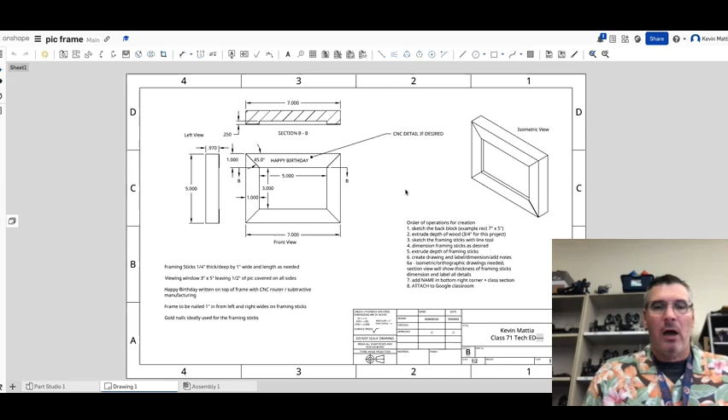All right, everyone, we're going to go ahead and make a picture frame today. We're going to make the picture frame on Onshape. It's going to look a lot cleaner than using a piece of paper and a pencil. And we're going to add some notes on this as well. The order of operations that we're going to follow is listed right here, and that'll all be available for you as well with this video.

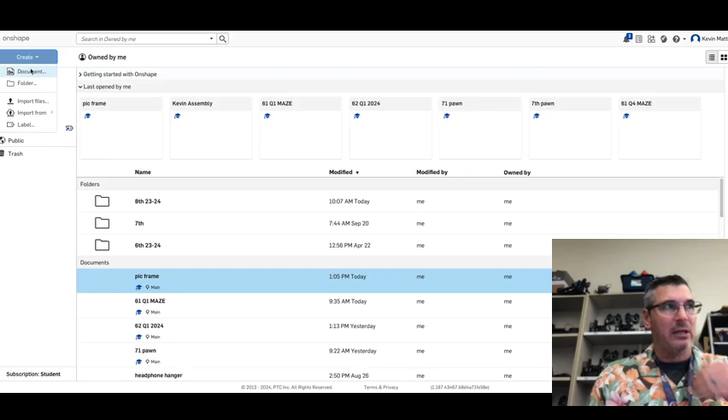So here we go. I'm going to start off at onshape.com. I'm going to go ahead and create a new document. And it's a picture frame, so I'm going to say Mattia pic frame. So you're going to put your first name. Don't put Mattia. You put your first name.

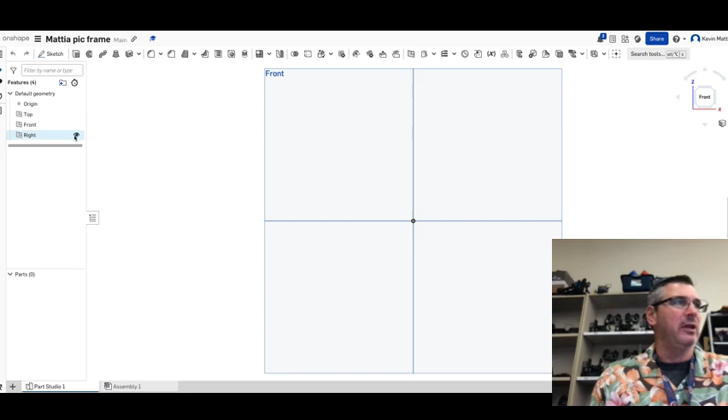So as always, I like to go to the front plane in the upper right-hand corner, and that'll square it up. And I like to hide these lines just so they don't get caught up in the way of us drawing. So you go to the eyeball next to top, right, and origin. And now we have the front plane ready to go. We're going to go ahead and draw. So the first thing we're going to do is make a sketch. My sketch plane is this front plane.

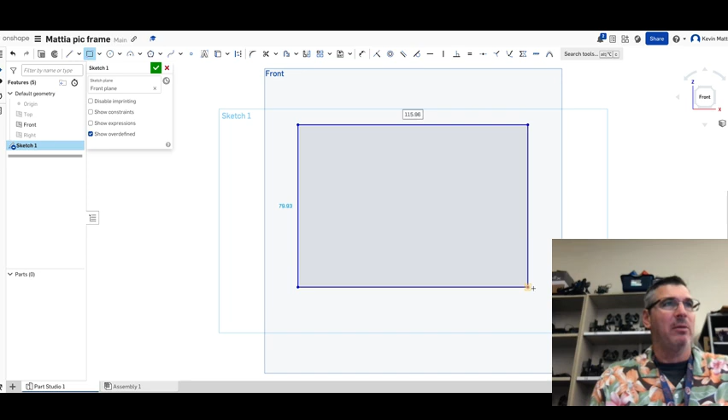Grab my rectangle tool. We're making the back block. The first thing we'll do when we create this out of wood is create the back block. Now I see that I'm in millimeters right now, so I'm going to go up to where it says Onshape, and there's 3 lines there, and I can change workspace units to make this inches instead of millimeters. So please change that to inches. I'll open up Sketch 1 again, and we're going to go to my dimension tool.

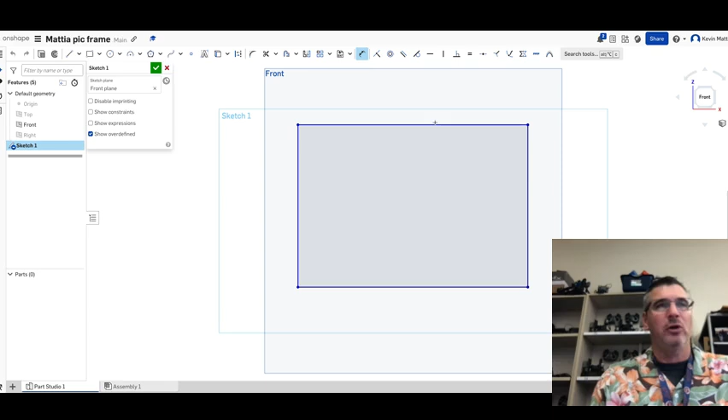Now, what size are you going to make this? I'm going to keep this as a straightforward picture frame, but you guys can do whatever you want. What size will it be? It's kind of up to you. I'm going to make it 7 by 5. So 7, enter that dimension, and then 1 click, 5, enter, and then I have a picture frame at 7 inches by 5 inches.

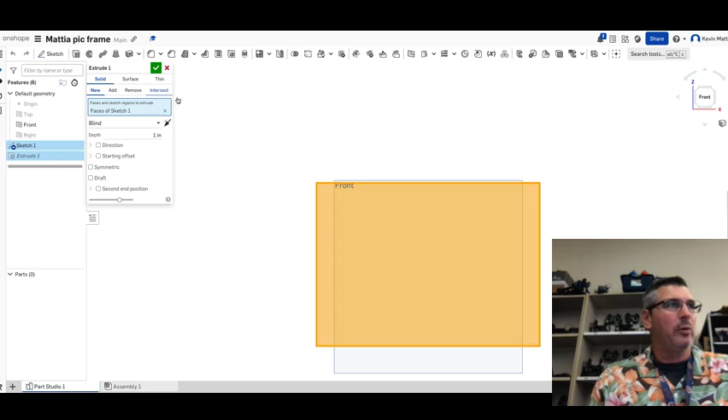Now I need to add my depth, and just knowing the wood, it's about 3/4 of an inch deep. So I'm going to extrude, and make a new one because there's not one here currently. 0.75 inches is my 3/4 of an inch depth. All right, there's my picture frame back block. So we'll make that out of wood first. We have this back block, and then we've got to put those framing sticks on, where we're going to work on cutting 45-degree miters and hammer and nail those on.

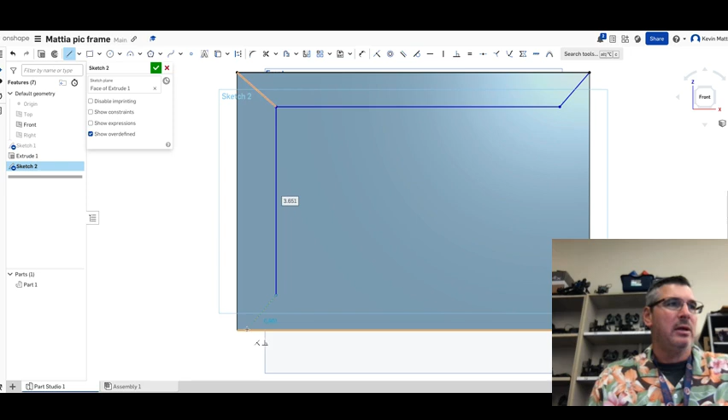So let's go ahead and add our framing sticks now. I make a sketch. My sketch plane is this surface here. I'm going to grab my line tool, start off in the corner, and drag that out, boom. Then I'm going to come across, boom, and then across here. And then I'll go all the way back across there. Good. And then I'll do that again, this one from this point down here. And you know how it is. We draw first, then after we draw, we can dimension. There we go. And I'll come across here to there. And that looks pretty good.

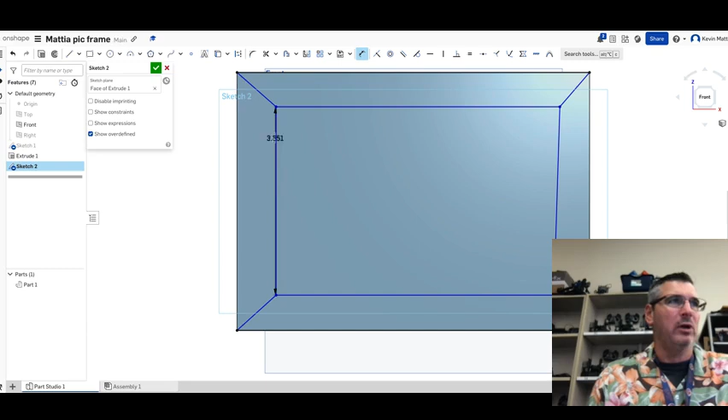Now we go to dimension. So I'll dimension, 1 click here to 1 click here. Now this is 7 by 5, and my picture is a 4 by 6. That's what I'm planning on. So the picture is 6 inches long, and this is already 7 inches long. If I make this piece here 1 inch, 1 inch plus 1 inch is 2, and 7 minus 2 is 5. So the picture is 6 inches long and 5 inches is my viewing space. That would work out. So I'm going to make this framing stick 1 inch. You have to consider what size it will be.

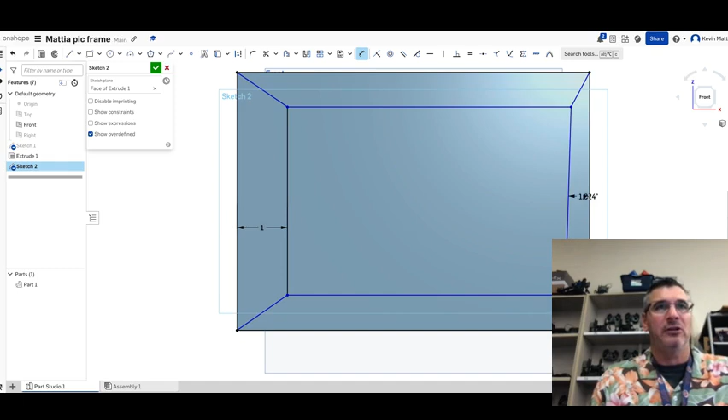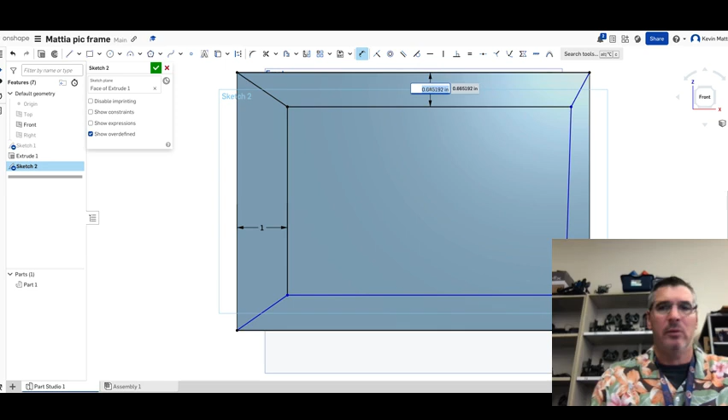Now this is angled here, so it's going to give me a degree. I'm going to make it 0. Whoops, I'm going to undo that. Let me undo this one here. Undo. Try that again. Dimension 1 to here. Yeah, we're going to go 1 inch. And we'll do this one, the other one there last. 1 inch. Okay, and then we've got to finish this one off.

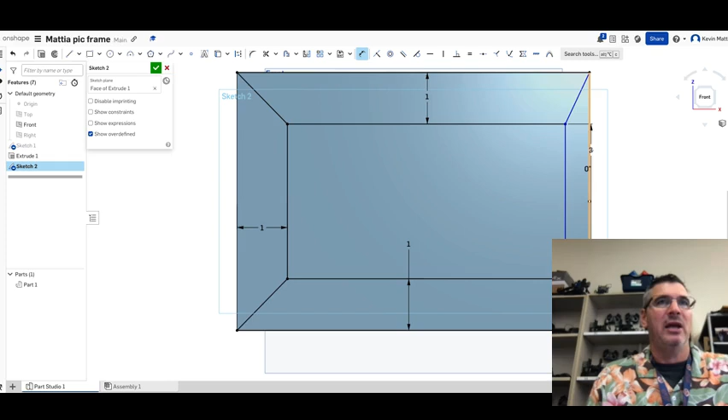So you can tell that this is not properly set up right now. So I'm going to dimension from here to here, and that's 2 degrees. I'll make that 0 degrees. That should square me up. And then I can say that this will be 1 inch. It did turn red, so now I'm going to go back and delete my 0 degree, and we are good to go.

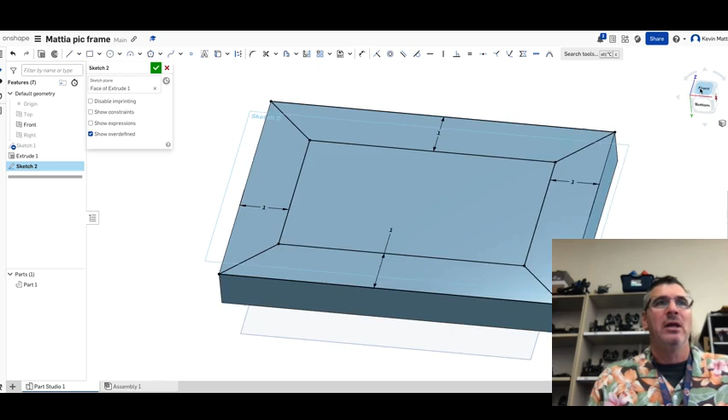Now, to extrude this, if I make them all the same depth, it's going to just be one continuous area around. And just for viewing purposes, I want to see each space a little more clearly. So I'm going to extrude 2 of them at a time. I'm going to do the top and the bottom at the same time. Watch this. 1 click here and 1 click here. Those 2 are the pieces I'm going to extrude now.

Go to extrude. And I'm going to make that, let's say, 0.25 inches, so 1/4 of an inch deep. It's an add, and check mark. There you go.

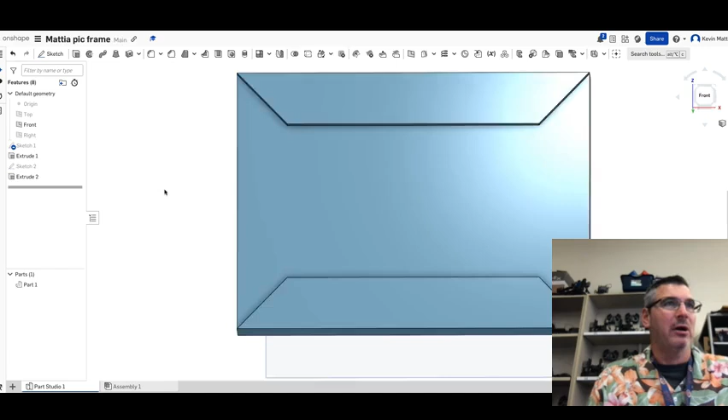Now I need to go back to sketch 2, and I'm going to do this side now and this side. So I did 0.25 for the other one. I'm going to go ahead and extrude these at 0.24 just for viewing purposes. They're all going to be the same height. We'll cut those on the saw. You guys will be with me when we do this. So I'll put 0.24, check mark, boom.

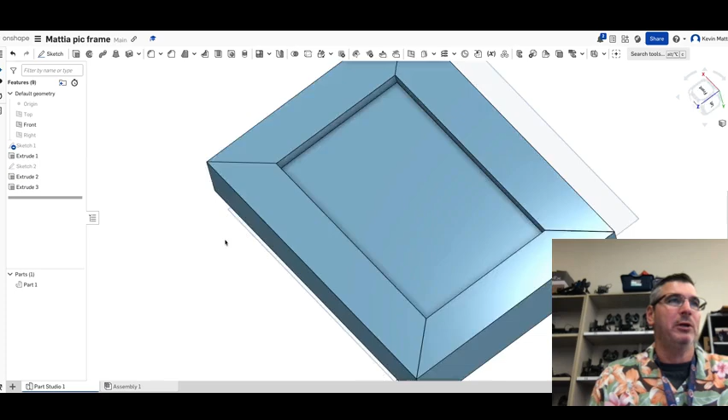Okay, so there we go. We have our picture frame. It looks pretty good. Cool. Now we go down to the bottom left. Plus sign, create a drawing. I want to create a drawing of this, ANSI B inches. Make sure you go to the templates, and we're going to use ANSI B inches. And okay.

It's coming. There's my part. Go ahead and click on that. And I want the front view. It's on a scale 1 to 2. That looks fine, 1 to 2 will work. So I'm at C3. And then I'm going to go ahead and add my top piece. It's already on, so I can go ahead and add that there.

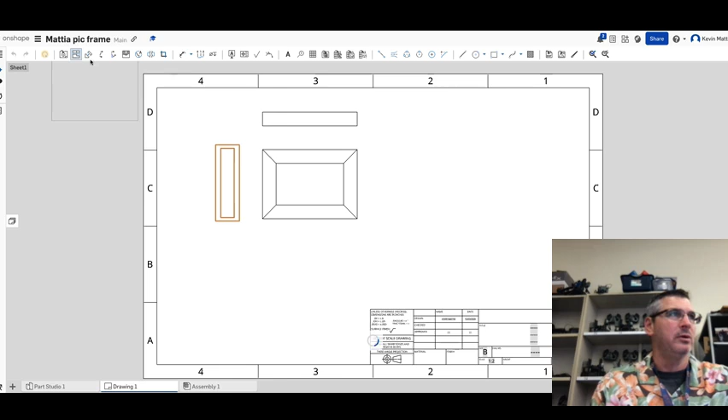And I want to add a left side as well. So go to Insert View, and we're going to add the left side. You can pause the video and slow it down if you need to. I'm also going to add the isometric view way up in the right-hand corner.

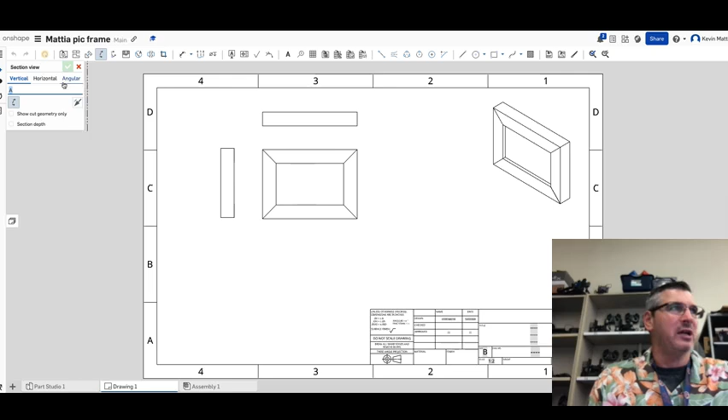Now, one thing we need to add here is a section view. The section view will show us this raised area. We want to have that dimension of how thick these framing sticks are. So if I go to section view here, I'll get a horizontal. It's on vertical right now. I'll go to horizontal, and I'll click here and drag it down. It will show that this is raised up here, and the picture will be laying on that inside area. Cool. Now I can go ahead and dimension, and I can start by dimensioning this side here.

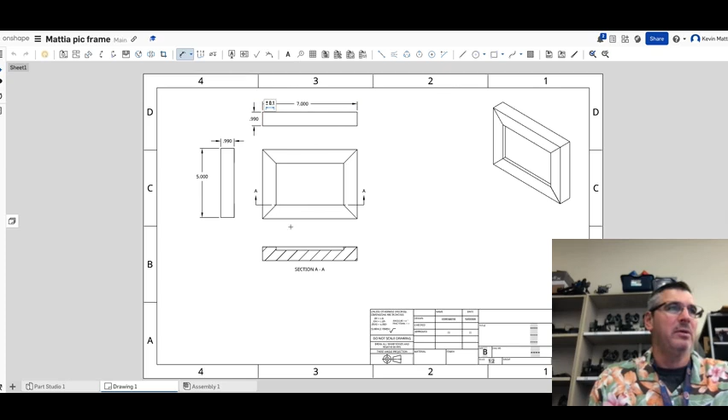Cool, 5 inches. This should be 3/4. It's got the top on it as well. That's why it's 1 inch, because there's a 1/4 inch on the frame plus the 3/4 backing. I'll show you that in a minute though. And this side is going to be 7 inches. Great. And that will be the same. And I'm going to go ahead and zoom in on this now.

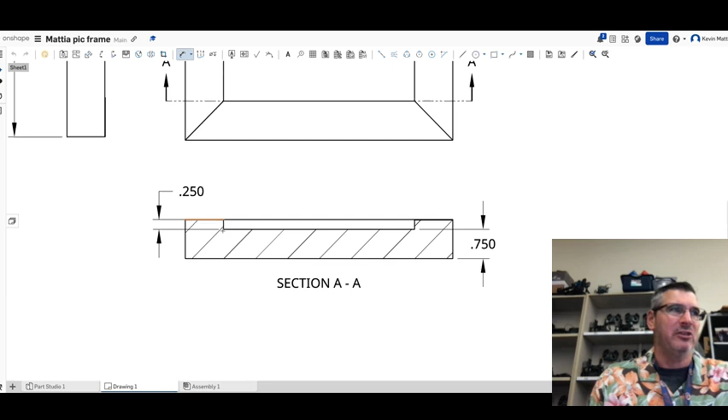Now this is where it will tell us that this is a 1/4 inch. Very good. And then if we go from the bottom to here, this is the back piece. It's 3/4 inch. I hope that makes sense. The initial backwood is this piece right here. And then this is framing sticks of a 1/4 inch up on top. That's what it's telling me. Cool. This is looking pretty good.

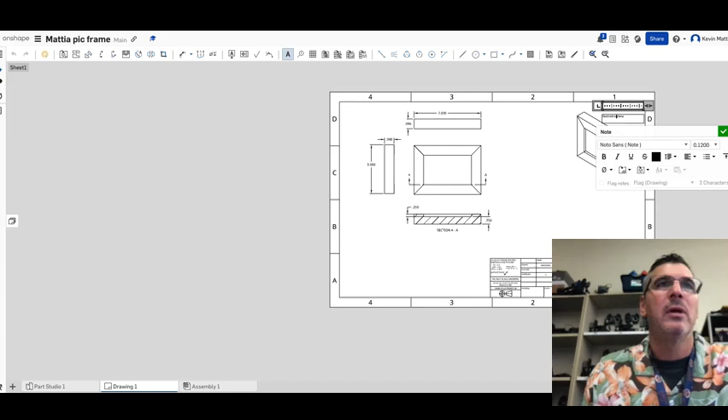I want you to go ahead and label it. This is the orthographic view. This is the isometric view. So click here. I'm going to drag this out a little bit and type isometric view. I think I spelled that wrong. Isometric view, check mark. Awesome. This is going to be the front view. And you would do this on paper if we were going that way, but this comes out much nicer, much cleaner. Top view, this is the left view.

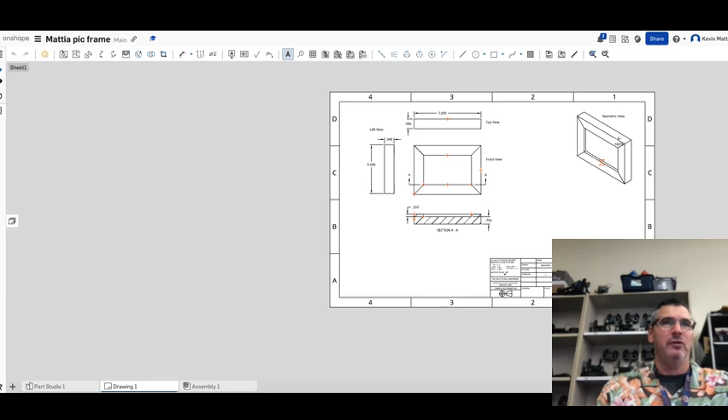And down here we have section view. If you took a saw and you cut this and looked from that direction as the arrows are pointing, from A to A, section AA, there we go, we see our section view. This looks great. And then we're going to go ahead and add some notes. I'm going to put the notes right down here, as you'll see on the plan that I have attached. And you can add all the notes as needed.

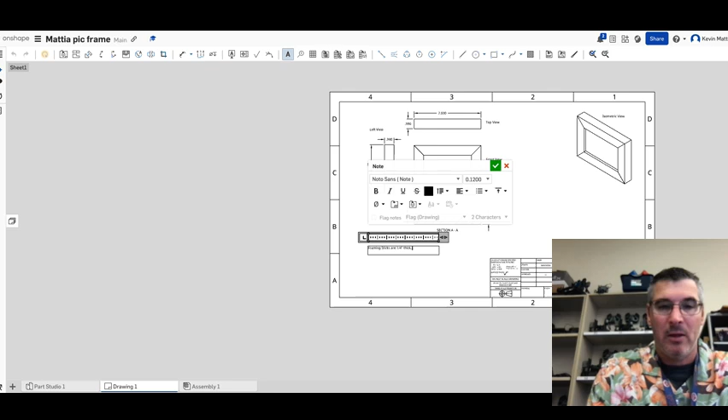Framing sticks are 1/4 inch thick, and they'll be as wide and deep as they need to be. They're also, for this one, 1 inch wide is what we decided, 1 inch wide. I do want to add a couple more dimensions here. I'll zoom right in here.

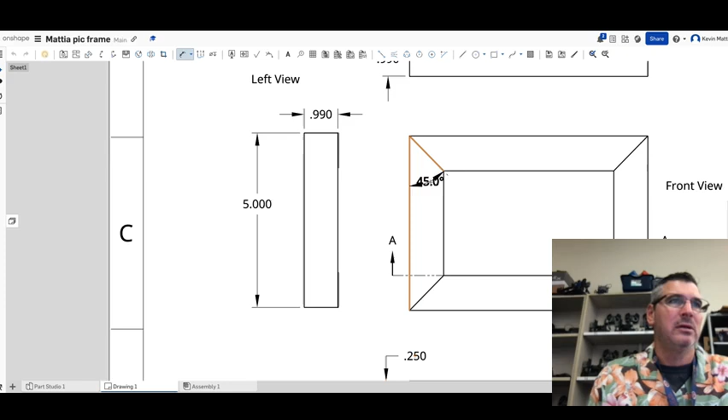So if I click one time here and one time here, that should give me a 45-degree angle. So I want that 45. There you go. Make sure I can read it. 45-degree angle, and then this should be 1 inch. Beautiful. And this also should be 1 inch. Beautiful. So we know the framing sticks are 1 inch.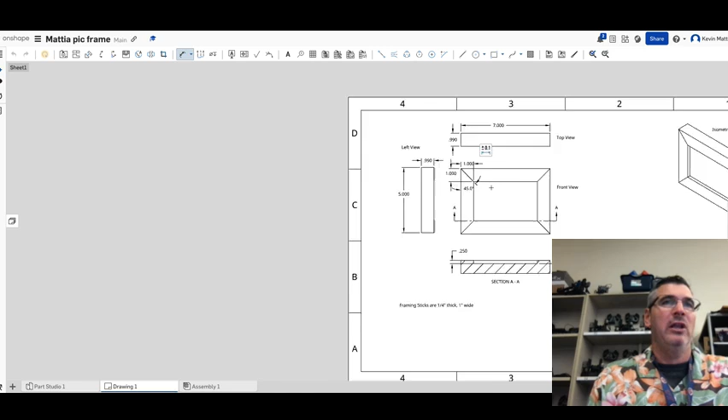We know that they're a 1/4 inch thick, and the length will be 7 to the outside, and then we'll have to cut that down. And we have a 45-degree cut, so two 45s make that 90-degree cut. And you can see all the other instructions as I've given you. We also want to come down here to the right-hand side, and you'll write your name on there. Pic frame, class section, 7-1, 7-2, whatever it is, and then hit the check mark, and that's good to go.

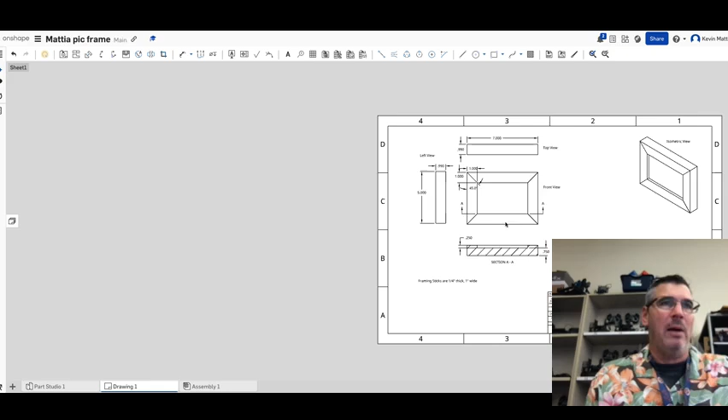Now my plan is already made. I know what I'm going with. I can right-click on drawing one. I can export this, and then I can attach that to Google Classroom. I just downloaded it, and now I can go to Add File, and that's my plan for this build that I'm going to go ahead and build.